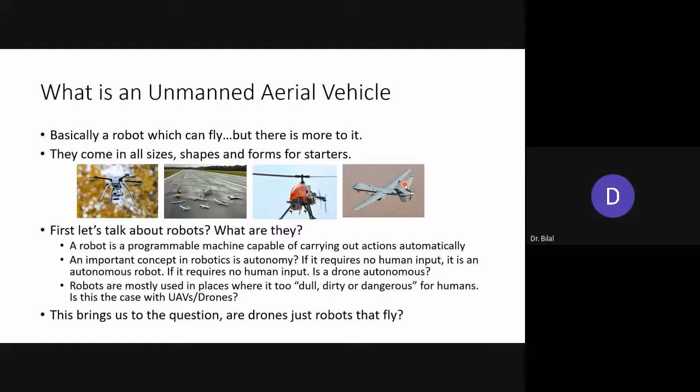So the other question now we need to ask is: is this the case with UAVs and drones? Are they used for tasks which are dull, dirty, and dangerous? And are they autonomous? These are two questions which we'll try to answer to find out what a UAV is. This finally develops into a question: are drones just robots that fly, or are they much more than that?

Before I answer that question, let's come to the many applications of drones, and this will prepare you for the exciting career that you can have in drones - the immense benefits that come with learning aerospace, learning about drones, being able to build them and building applications around them.

So the military use of drones is again driven by the same concept: dull, dirty, and dangerous. For example, if you're a pilot who has to fly a mission which is 24 hours long, who can keep awake for that long, who can stay attentive for that long, even if you're working in shifts with a team of 4 pilots? Think of the extra burden you're taking on because of the number of pilots you need to change every cycle. Long missions up to 2 days are now available with military drones. So that is something which is very dull.

Reconnaissance: for example, if you're in the middle of battle and your fortress or camp is surrounded by enemies, then being able to go outside and poke your head out from the turret or the bunker to find out what's happening around you - called situational awareness - is very difficult to do as a human being. If you put yourself in harm's way, even with a manned aircraft, bringing it down to a sufficient level to take photographs or understand what's happening on the ground puts you in harm's way of anti-aircraft fire or high tension wires. So again, this becomes dangerous for soldiers to go out in those situations. So the other D is dangerous.

And this shows how Pakistani engineers and technicians can achieve what they want if they have the will to do so. And this aircraft, by the way, was also designed by me, and we have a few flight sorties of it now. It's a jet-powered drone.

Finally, if you look at the cost comparison, even the smallest drone in a military application costs more than $40,000. Now compare its size; it's just 18 grams, which is something like 2 pennies stuck together. In 5 rupees ke 2 sikke, if you stick them together, probably this is the weight that we're talking about. It costs $40,000. If you look at a similar drone in the commercial market, such drones are available. They launch from your hand, and they can take pictures also. They cost something like $200.

So look at the price comparison. You can understand that once a thing becomes military qualified, has military applications, and is related to the very high end of users, then the price tag increases significantly. So there's a lot of business to be done and a lot of capital to be earned in the military industry.

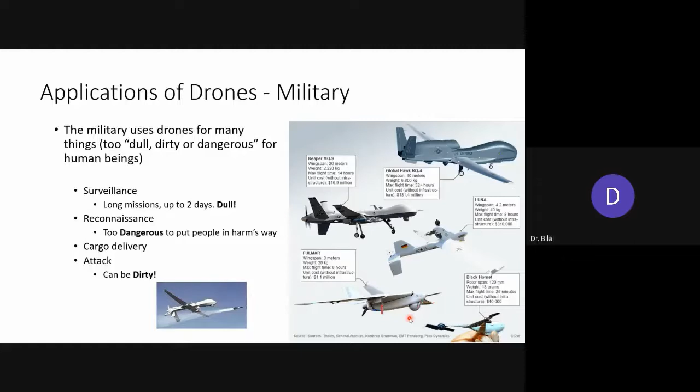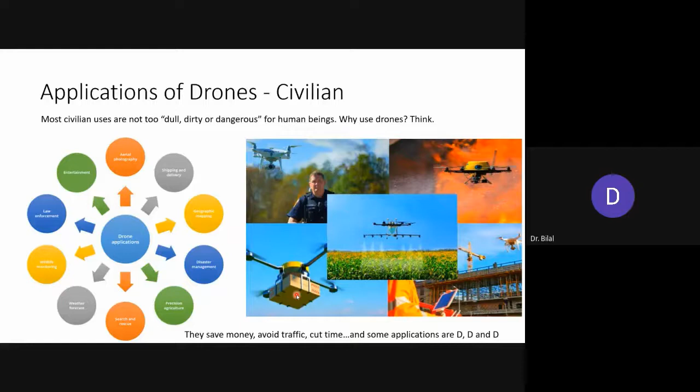But some applications are also dangerous, which again in civilian applications can put people in harm's way. For example, we are doing some mapping in Balochistan, and there's a law and order situation there. So you can overcome this by putting just one station at a certain hill and doing the entire construction mapping or whatever you want from that station, which is well provided with security.

So we come to the question we raised earlier: are drones autonomous? The answer is yes and no. Some drones do not require any human intervention—you just pre-program the task it has to do. It has to go to a certain place, drop a certain payload, for example, or in this case, do mapping. So I'm just going to tell it to do the entire area from this point to this point, in a grid, going on like this and this. It's called the lawn mowing fashion. You can do that for the whole day, and you just need to give it an input of takeoff. So from takeoff to landing, it's basically autonomous and does not require any human input.

Similarly, with this agriculture drone, you just tell it the area to spray, and it's going to program its own path. It's going to find out which areas to spray, how to avoid obstacles, when to come down when the battery is low, when to sound an alarm, etc. This is all pre-programmed. You don't need to intervene. So there are some drones which are what we call fully autonomous.

Sometimes, however, you need a human operator, who needs to redirect drones and take decisions that are not pre-programmed. For example, if you want to do search and rescue and revisit an area again, you need to tell the drone to keep searching this area—I want a closer picture. So the human is now in the loop, not in flying the drone, but in telling the drone where to go. Because if the human was actually using a remote control to do that, it's no longer a drone.

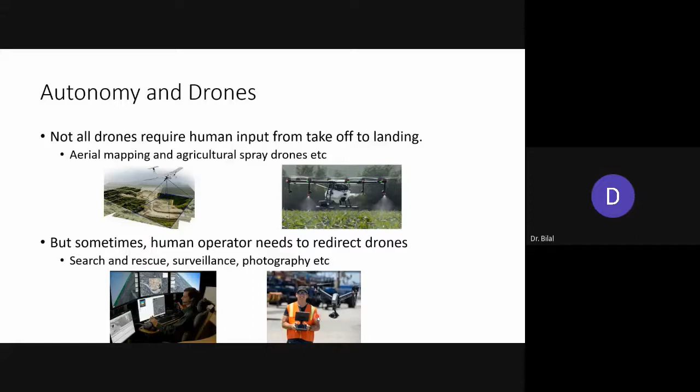It's no longer very relevant how efficient the mechanical design is, even though it is, but it's more about what type of electronics you can put inside. In this case, there would be some servos - motors which turn the control surfaces to make it go right, left, up, down, faster and slower. There's also a propeller controlled by an ESC, an electronic speed controller, which controls the speed of this propeller.

Then there's going to be batteries which power up the entire contraption. There's a GPS, the global positioning system, which tells the aircraft where it is right now. Then there's also the autopilot, which has a lot of sensors inside telling it if it's banked right, banked left, pitching up, pitching down, what attitude it has, and what height it's flying at, because GPS isn't very good at giving you height. So there's a lot of computations involved.

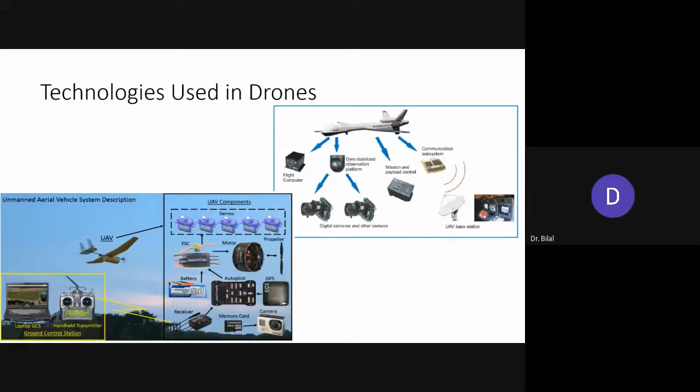A very important question which people often ask is, are drones taking over human jobs? And the answer is again yes and no, because some of the jobs that they're taking over are the 3 D's: dull, dirty, and dangerous. In that case, yes, they are taking over the jobs. However, this does not mean humans are going to be jobless, because the jobs drones are taking over need not be done by humans. However, you need people to make the drones, you need people to control them, you also need people to program them, you need people to make smart innovations around them, and that is where the job market is needed.

So instead of being basically a crew member or a flight steward, you can also think about being a drone pilot or a drone technician. Much of aviation today is controlled by computers. Even the manned aircraft you can see over here, there are autopilots here, and there are a lot of instrumentation panels over here.

Just because they came on board did not make the humans redundant. They just moved on to smarter jobs than putting their hand on the stick all the time. Which basically means that we as students, researchers, and business people need to live with the time, move along with it, and come up with smart solutions which are sellable.

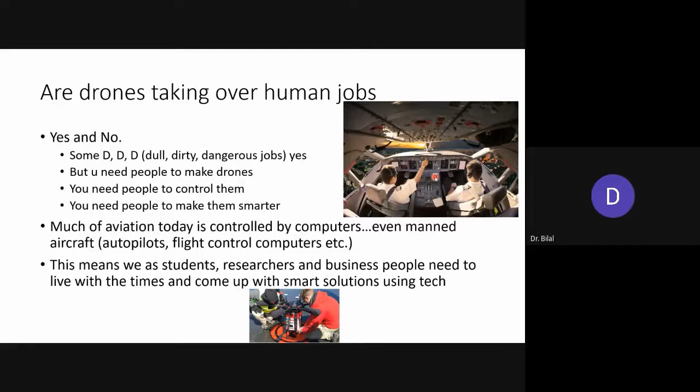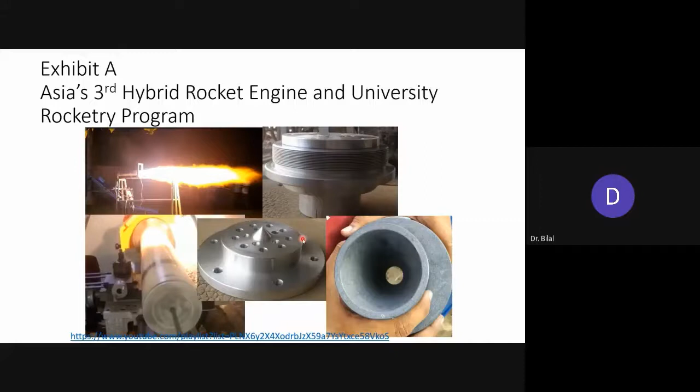So in the end, I'll give a few motivating examples. When I came back to Pakistan from Saudi, we did not have a lot of funding. We started ideas in my university as final year projects or capstone projects. We actually developed Asia's third hybrid rocket engine, something we did for around 25,000 to 40,000 rupees. I don't remember the exact cost, but all of these intricate parts were made in local shops, and we were able to fire and sustain the combustion.

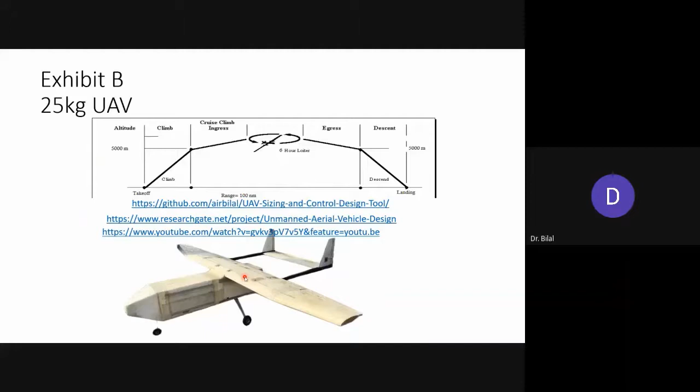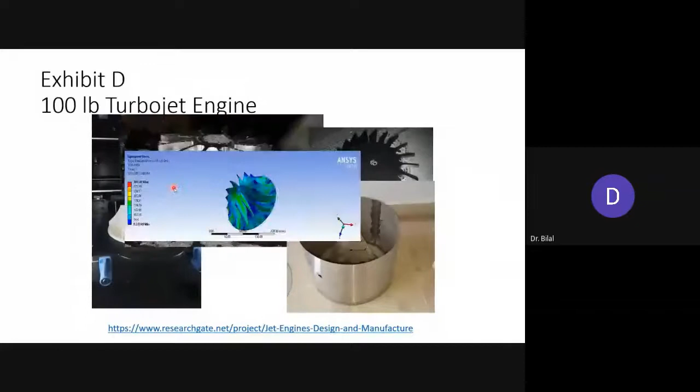We are able to make small UAVs. This is a crude version, but we were able to fly it for a long time. We are also able to make catapults—this was a student project which we scaled up to the picture I showed you. They also made some turbojet engines and some liquid rocket engines.

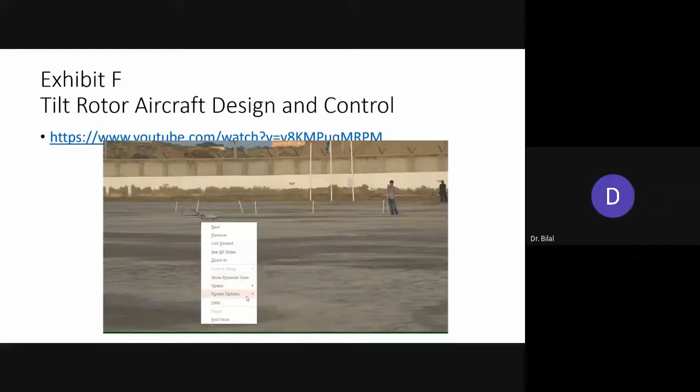Let me stop the pointer. Okay, and this is something we recently did, which is basically a tilt rotor drone, and this is flying in Karachi.

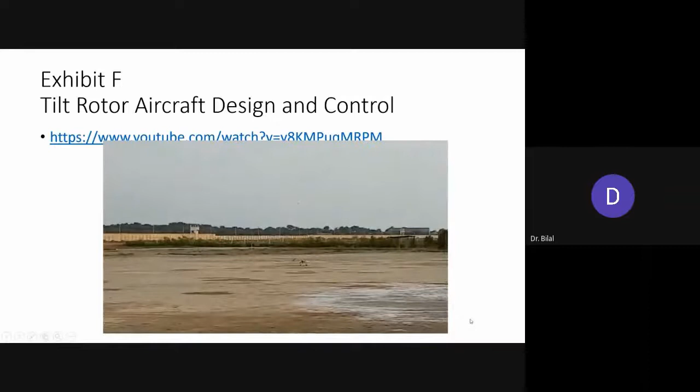Thank you, Dr. Bilal. It was very exciting and very heartening to see what you have done for the country and for aviation. A lot of people thought when the Industrial Revolution came in, the tractor would make people jobless because all the farmers would go out of work. So I think it's the same thing here—it didn't happen, the entire efficiency increased everywhere. So I think this is going to do the same thing, isn't it?

Yeah, exactly. I think when robots were first introduced in the auto industry, there was the same apprehension—that robots would take over, you wouldn't have any workers on the shop floor, people would get fired, or robots would take over the world. And it did not happen. What happened was more jobs were created because of the robots, and people actually became less sick and less prone to error. The cars became much sturdier. You had more people working on repairing the robots, getting them to work, designing better robots. So what happened was it transformed the perception of what a job could be.